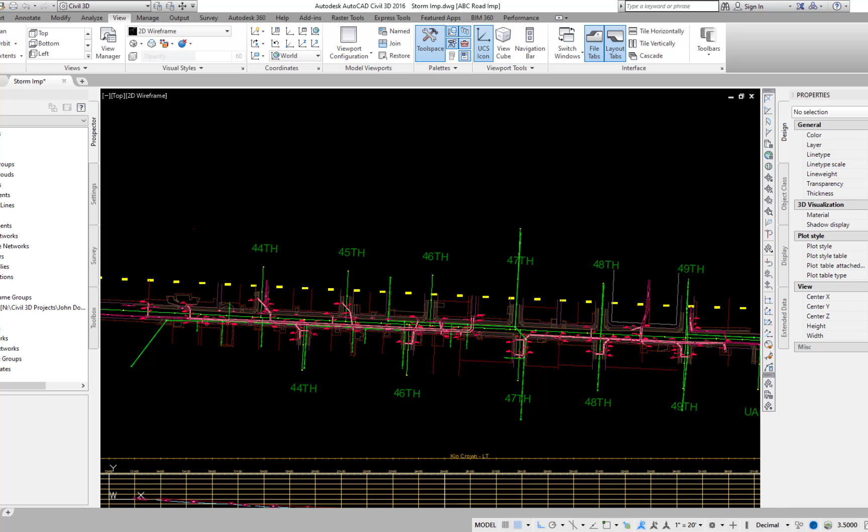Branch storm profiles are created in their own profile view. Generally, the length of the branch storms are fairly short, and several branch profile views are shown on a single profile grid sheet. A miscellaneous alignment is required for each branch storm profile.

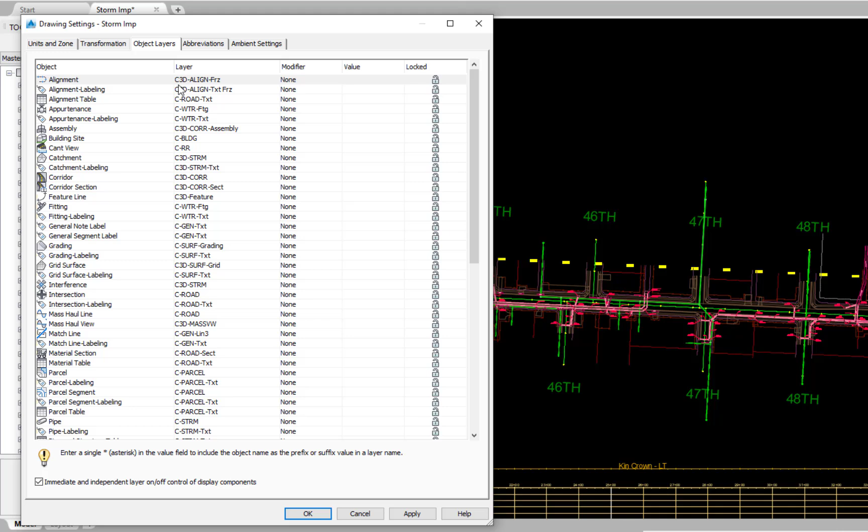Set defaults for branch storm layer defaults: right-click drawing name, edit drawing settings, object layers, alignment C3D align freeze, alignment labeling C3D align text freeze.

Right-click alignment, edit feature settings, default styles: alignment pipe style pipe net align, marker style none, alignment label set no labels, leave others as default, default name format alignment name template -Kinkead.

The name of alignment is the station of the downstream branch structure and the road name the structure is on. Leave others as default. OK.

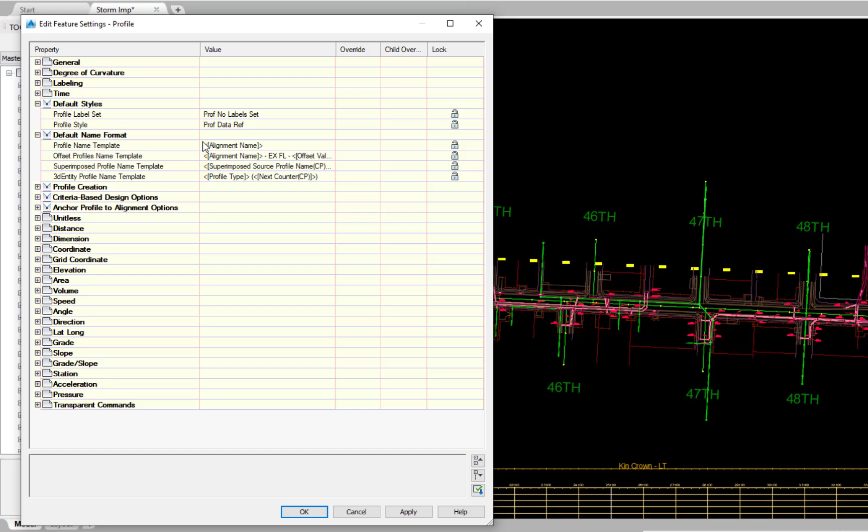Right-click profile, edit feature settings, default styles: profile label set profile no label set, profile style profile data reference, default name format alignment name, leave others as default, OK.

Profile view, edit feature settings, default styles: marker style none, profile view style pipe network 20 horizontal, 5 vertical, profile label set profile no label set, leave others as default, OK.

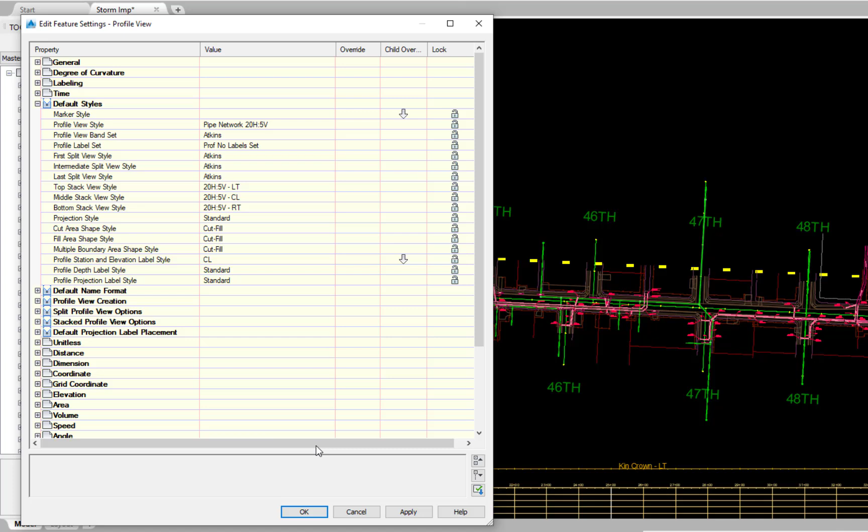Insert the profile grid sheet into the drawing. Enter. Browse, drawing reference Atkins profile grid sheet, open, specify on screen place check mark, scale 20 do not place check mark, rotation 0 do not place check mark, explode yes place check mark, OK.

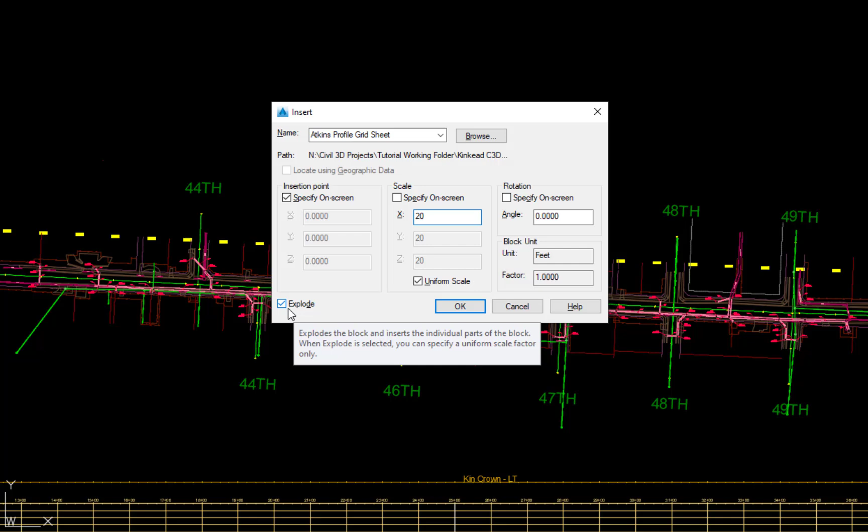Pick an area below the side road profiles for the lower left corner of the grid sheet. If needed, move the grid sheets to the desired location. Enter.

Two grid sheets are inserted. Use the vertical 1 inch equals 5 feet; erase the vertical 1 inch equals 3 feet. Enter.

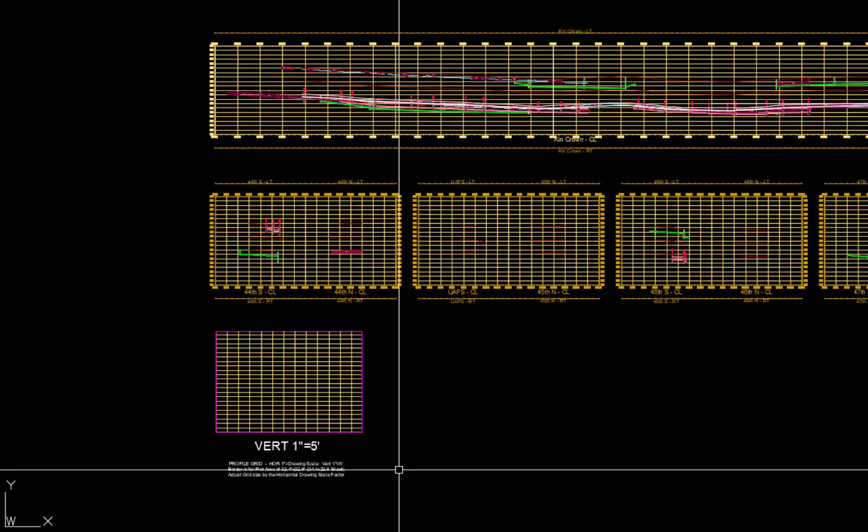Make two copies of the grid sheet to the right. Enter. Select the grid sheet. Enter, and move horizontally for two grid sheets.

Escape. The border around each pre-formatted grid sheet is set up for plotting using the section paper space viewport area on the Atkins plan production template.

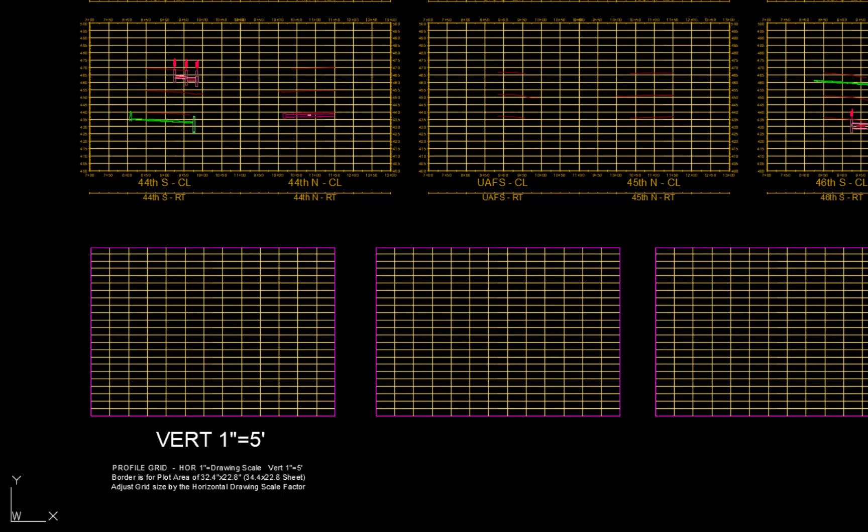The vertical grid lines for the horizontal stations are spaced at 50-foot intervals for a plotted horizontal scale of 1 inch equals 20 feet, and the horizontal grid lines for the vertical elevations are spaced at 5-foot intervals for a plotted vertical scale of 1 inch equals 5 feet.

It is best to create the branch pipe alignment and profiles at the same time so that the pipes and structures to be included in the profile view will automatically be selected.

Profiles can be created at a later time; however, the network structure and pipes need to be selected from the list of network parts. This could be a little cumbersome if there are many parts in the network.

Each branch pipe run will have its own profile view with a name that is referenced to the station of the downstream structure, and will be plotted on the profile grid sheet. After creation, the profile views can easily be moved to a desired location on the grid sheet.

Generally, profiles are created with stationing increasing from left to right. The structure at the lowest station should initially be selected for the desired orientation of the profile view. For this video, the branch profiles along Kinkead will be viewed looking to the west or left.

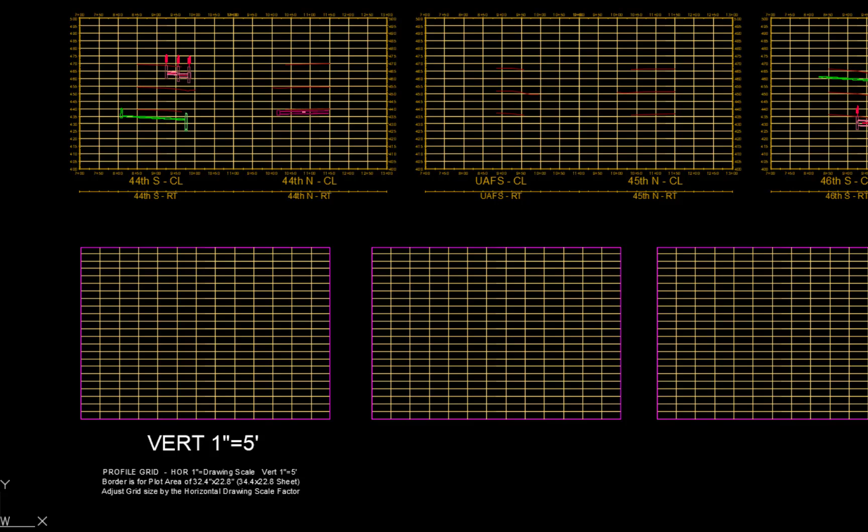Along the branch storm alignments, the lower stations will be to the south and the higher to the north. After creation, the stationing of each branch alignment will be adjusted so that 10+00 is at the center line of a crossing road. The drawing shows two horizontal viewports with plan on top and profile grid sheet on bottom.

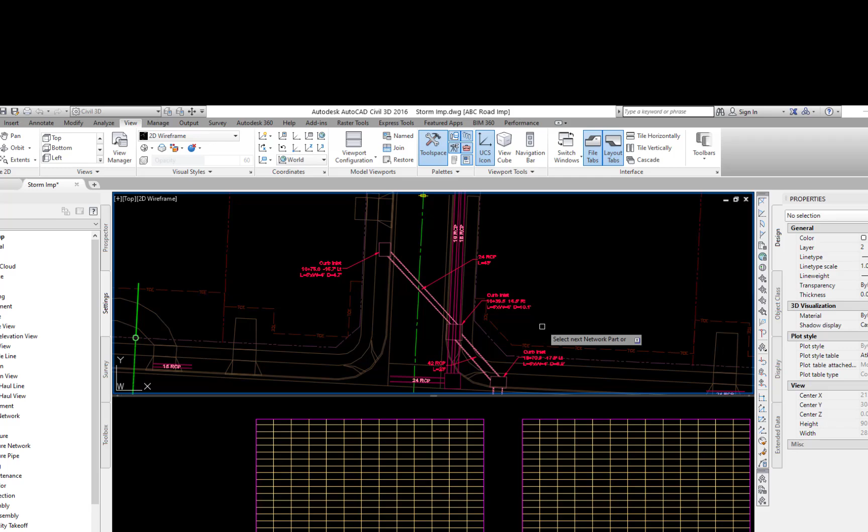Pick the most southern structure in a branch run. In the context-sensitive ribbon, pick alignment from network, and pick the most northern structure in the run.

Enter. In the Create Alignment from Pipe Network dialog box: site none, name enter the station-road name for the downstream structure. If station is not visible, use 10+00; this can easily be changed later.

10+00-Kinkead. Type miscellaneous, starting station 10+00, alignment style pipe network, alignment layer C3D align freeze, alignment label style no labels, create profile and profile view place check mark, OK.

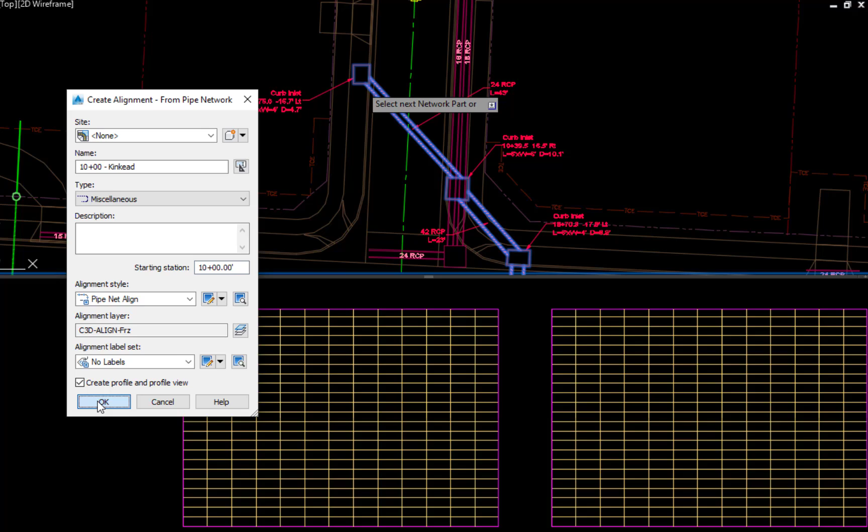In the Create Profile from Surface, alignment: check that the name is correct, station range to sample leave as default, select surfaces, hold shift key down and select the existing surface and the top surface, add, check the style: existing surface, existing ground, OK.

Kin top surface, profile data, select draw in profile view, do not select, OK.

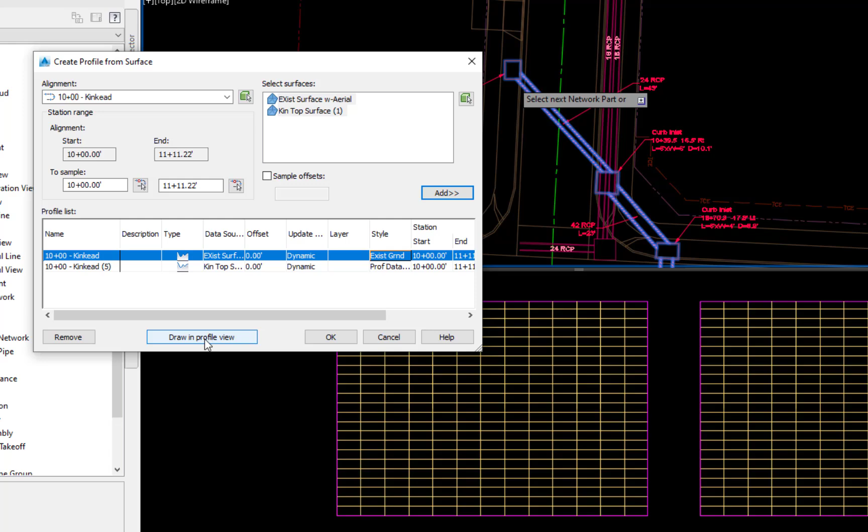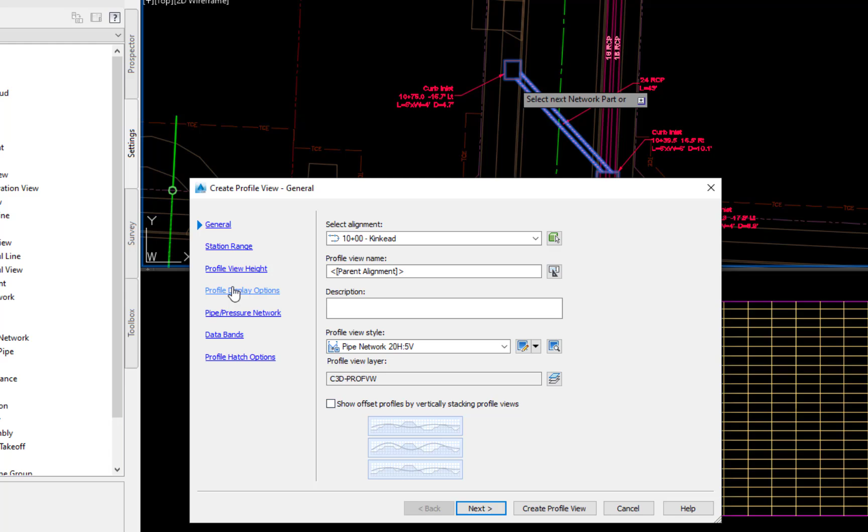In the Create Profile View dialog box, general: check that the name is correct, profile view name parent alignment, description none, profile view style pipe network 20 horizontal, 5 vertical, profile view layer C3D profile view, do not select offset profiles, remove checkmark, station range user specified, start.

Start 9+00, end 11+00.

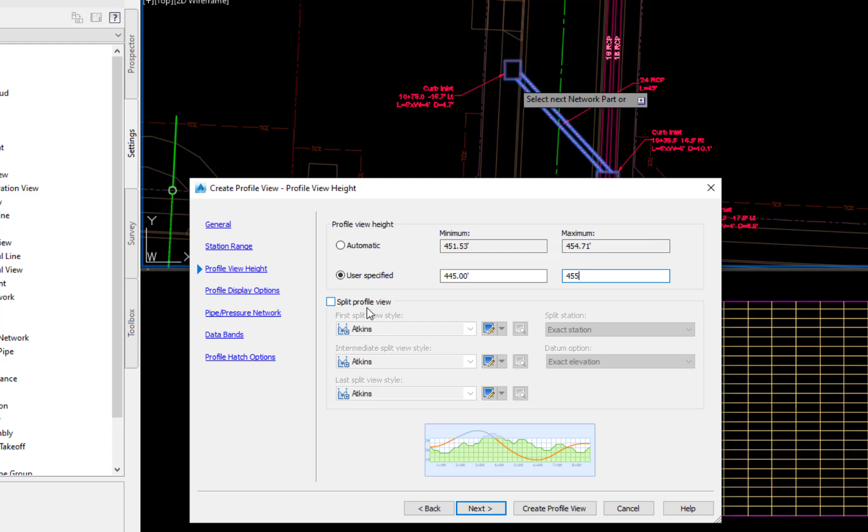The start and end station of the alignment will later be modified, but the profile view station range will remain the same. Profile view height is user specified: set a minimum by entering an even 5 foot value that is at least 5 feet below the current minimum elevation, 445. Set the maximum as an even 1 foot value above the current maximum elevation, 455. Do not split the profile view; leave that option unchecked.

For profile display options, draw the existing surface and the existing top surface. For the pipe pressure network, the parts included in the branch run are checked. To create the profile view, with snap on, pick an intersection point of a horizontal and vertical grid line.

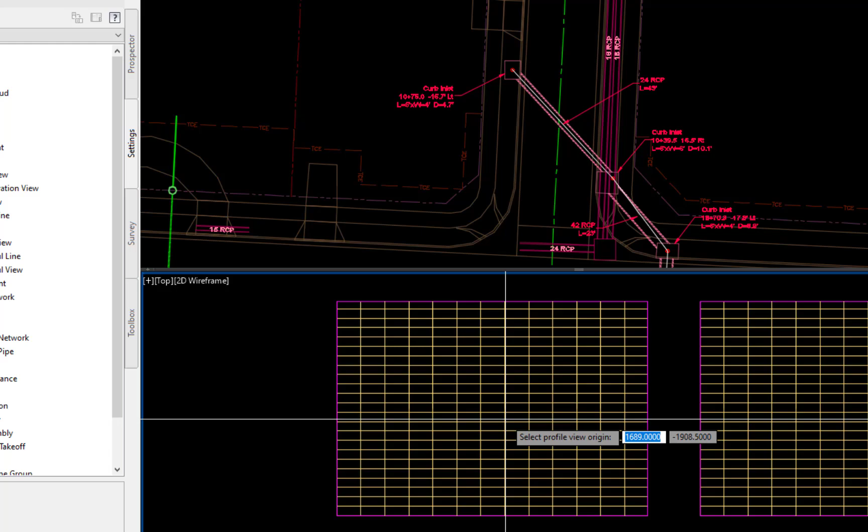The profile view with profiles will be displayed. Move the profile view to a desired location. Pick the label, then pick the left end point of the bottom axis and move it to a desired location.

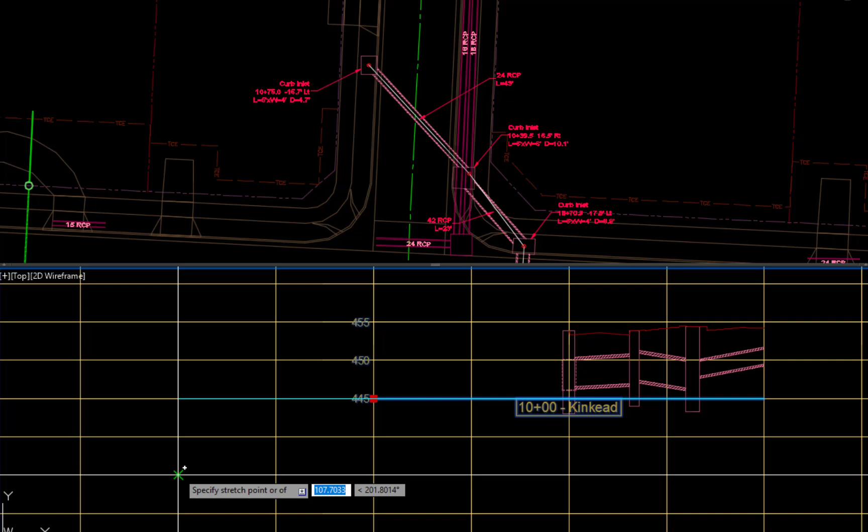Click OK to change the name of the profile view. Pick the profile view name label. In the Properties palette, change the name to the station of the structure, 18+70.

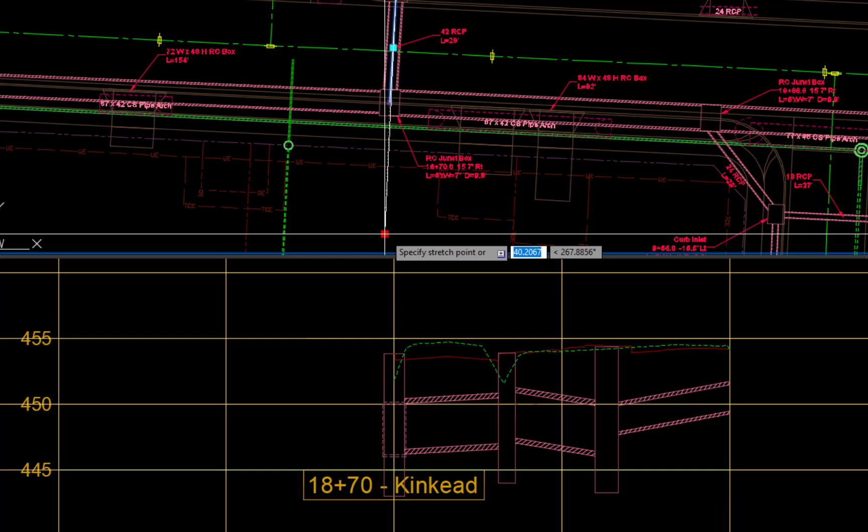Enter. Extend the start and end points of the alignment to enhance the display of the existing and top surface. Pick the alignment in plan view, pick the glyph at the start of the alignment, and move approximately 20 feet south of the structure using the current alignment as a guide, then pick and escape.

At times, it may be desired to insert an angle point in the alignment in order to display the existing and top surface profiles beyond the structure at right angles to the road.

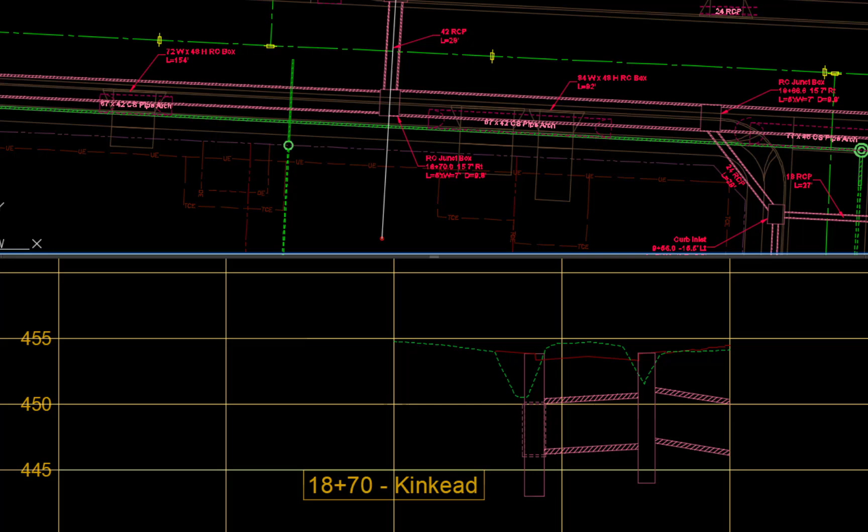Pick the alignment, move the cursor and right-click, then choose Edit Alignment Geometry and open the Alignment Layout Tools. Pick the Insert PI icon, then pick a point in the current alignment near the structure.

Draw a temporary line from the end point of the alignment at the center of the structure. Type L and Enter to start the line command, pick the end point of the current alignment, then move to a clear area and pick.

Escape, then pick the alignment and pick the end point. Move approximately at right angles to the road and about 20 feet from the structure, then pick the angle point glyph.

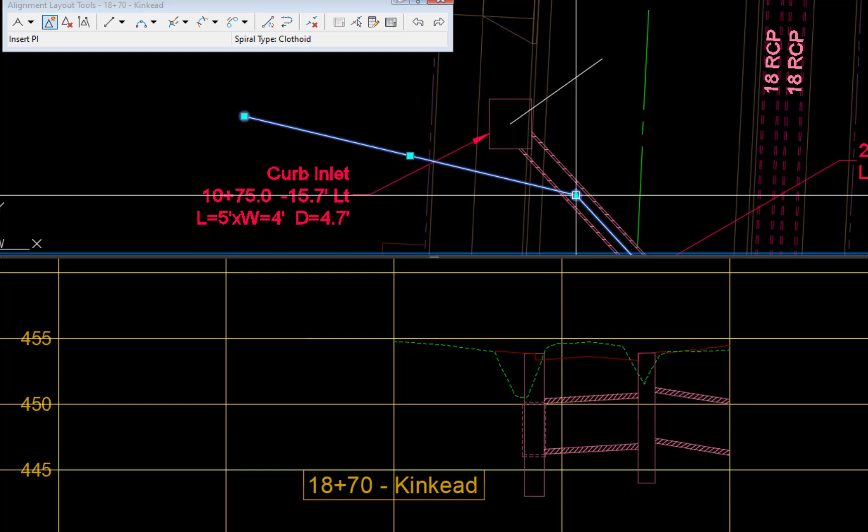Move to the end point of the temporary line and pick, then escape. Erase the temporary line by picking the line and deleting it. Escape, then adjust the location to 10+00.

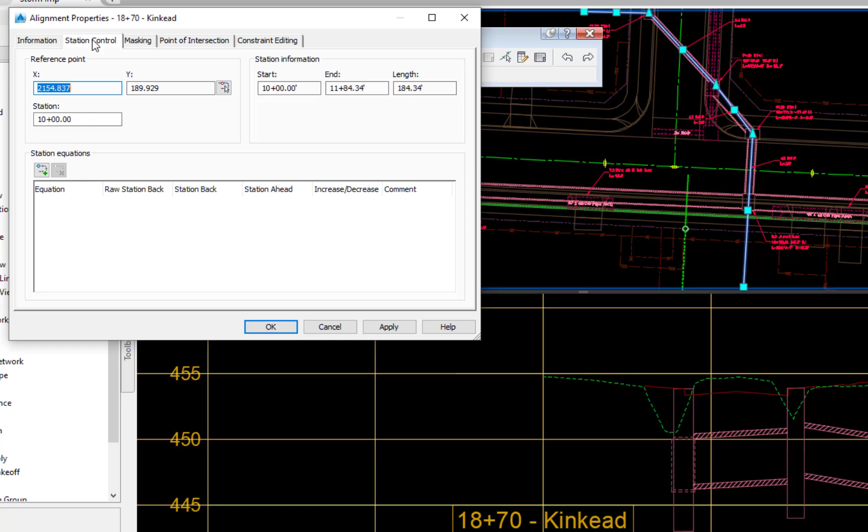Pick the alignment, move the cursor and right-click, then go to Alignment Properties, Station Control, and set station to 10+00. Pick the location for 10+00, pick the icon, and in the warning box select OK.

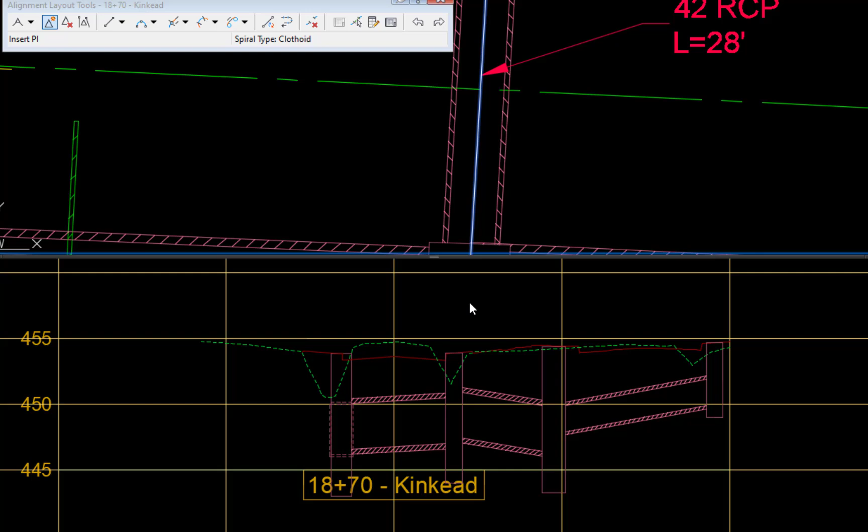Zoom in and pick the intersection of the alignment with the center line, then choose Intersection, Pick, Apply, OK. The alignment at 10+00 is now at the center line of the road and located along a vertical grid line.

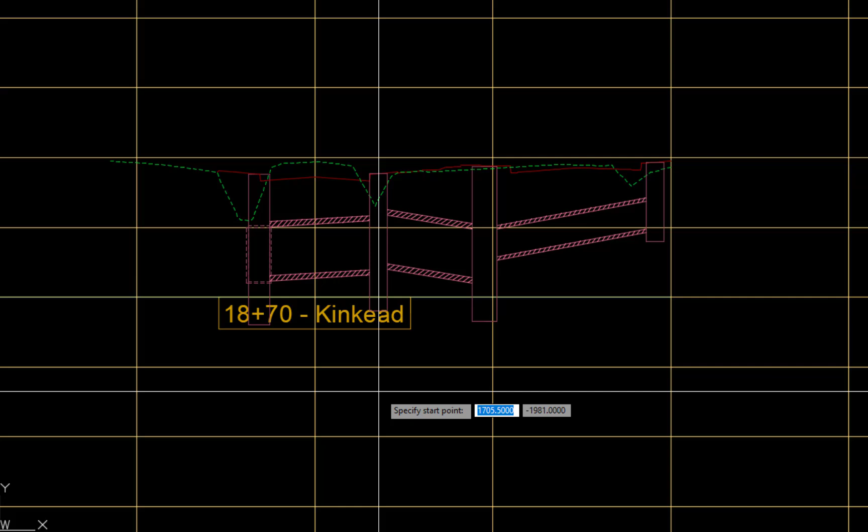Adjust the elevation of the branch storm pipes. Draw a temporary reference polyline that is approximately 3 feet below the finished surface. Type PL and Enter to start the polyline command, then pick several points along the top surface.

Escape, then type M and Enter to start the move command. Pick the polyline, Enter, and pick a point. Move vertically downward and enter 12, which represents 3 feet at the 4:1 vertical scale factor. Enter, then pick a pipe.

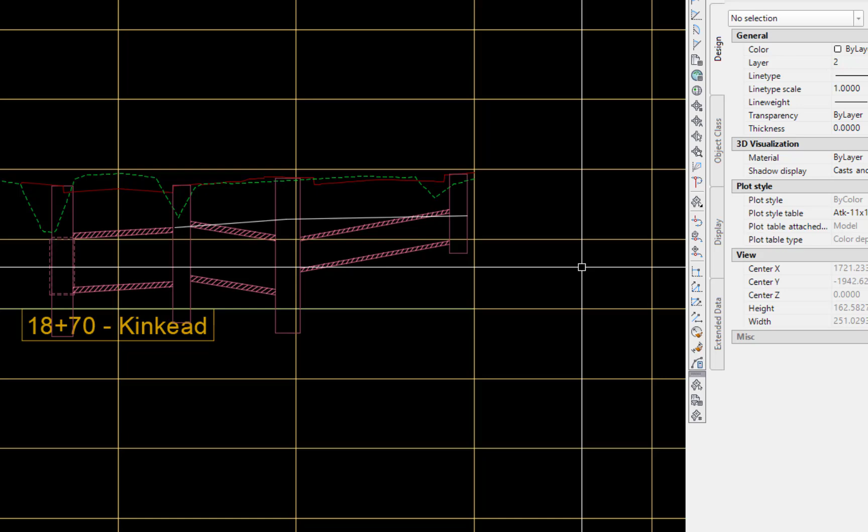Use the end glyphs to move the pipes to the desired elevation, using the invert of the previous pipe and the polyline as a reference for the approximate depth of cover.

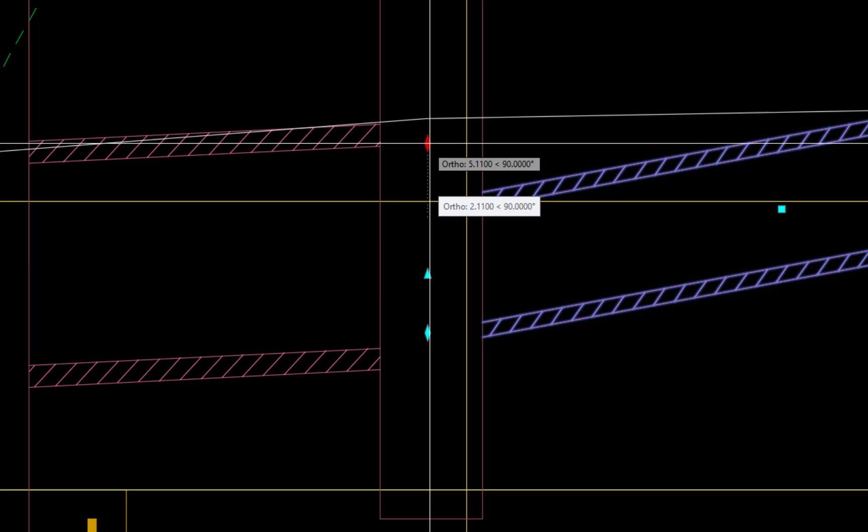Escape, then pick a structure, move the cursor, right-click, and open Structure Properties. Check the reference surface and the reference alignment; this structure is along Kinkead. Check the insertion rim elevation and check the sump depth, which is 0.

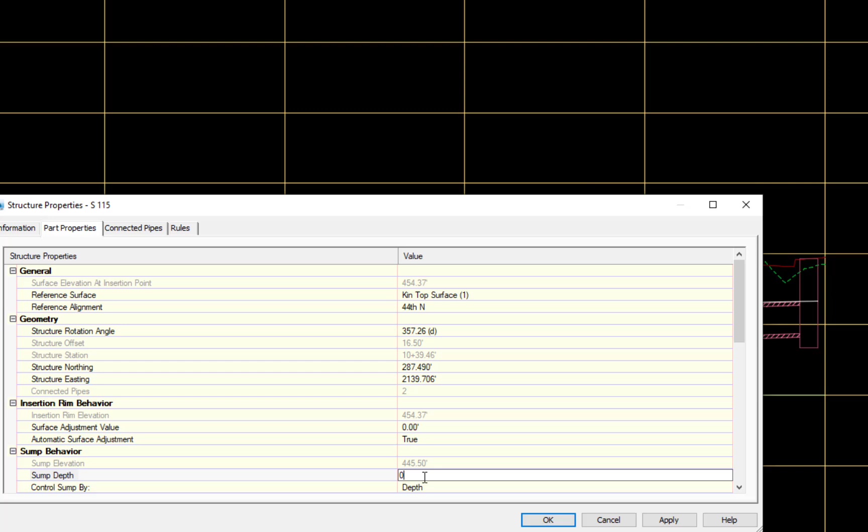Enter, Apply, OK, then repeat for the other structures: check structure properties, surface reference and alignment OK, rim elevation OK, sump depth 0. Apply, OK, escape. This structure is along North 44th Street and the reference is correct, with sump depth also 0. Apply, OK.

The drawing shows a grid sheet with the center line, station 10+00, and several branch pipe profile views added. Each profile view is located so that the road crossing station of 10+00 aligns with the same vertical grid line. Each profile view is arranged with the lowest station near the lower left corner of the grid sheet, with each succeeding higher station profile view placed directly above, or if there's no room, at the bottom of a new column to the right.

The start and end stations of the profile view should be set at even 50-foot stations, and where practical, should be equidistant from 10+00 so that the profile view names line up vertically.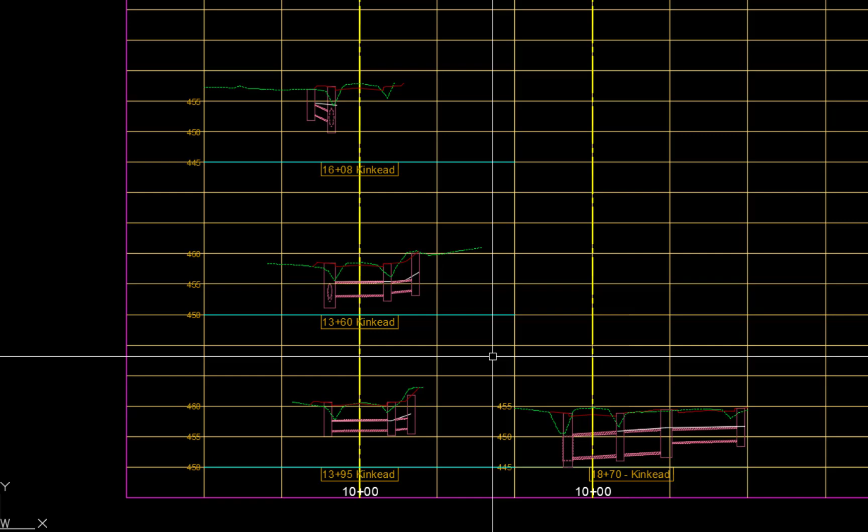To change the appearance of a profile view, pick the name, move the cursor and right-click, then go to Profile View Properties, Stations tab, and select user specified range with a start station of 950 and end station of 1050, which is equidistant from 10+00 and the start station. Apply, OK.